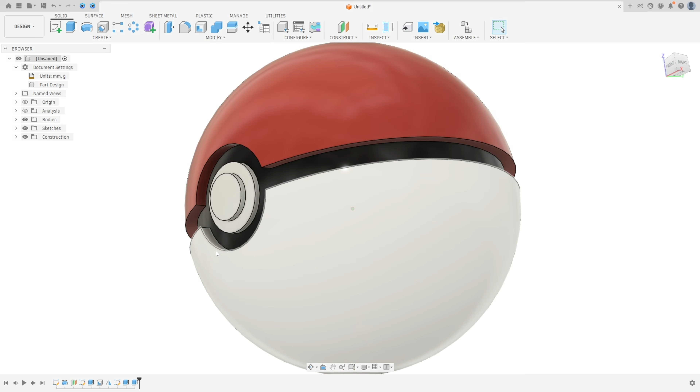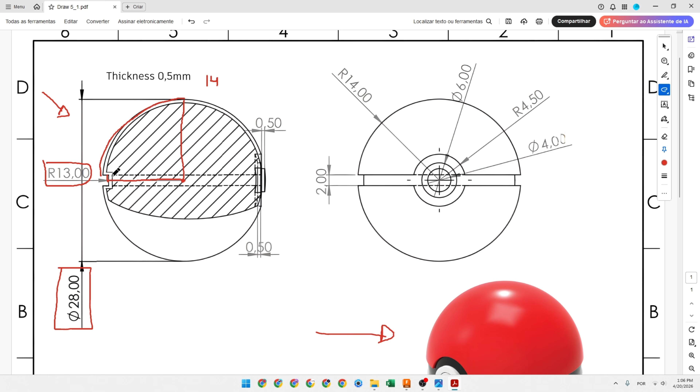The first step to create this Pokeball, we will select the front plane and make this sketch, with the midpoint here. First we create a center line with 14 millimeters of length, and create this arc with 14 millimeters. Then we create a line with 13 millimeters and create this arc with 13 millimeters. Then we create a line to close this sketch.

So open Fusion and go to create a sketch, select the front plane, select line, and make a line here with 14 millimeters, and create another line here with 13 millimeters.

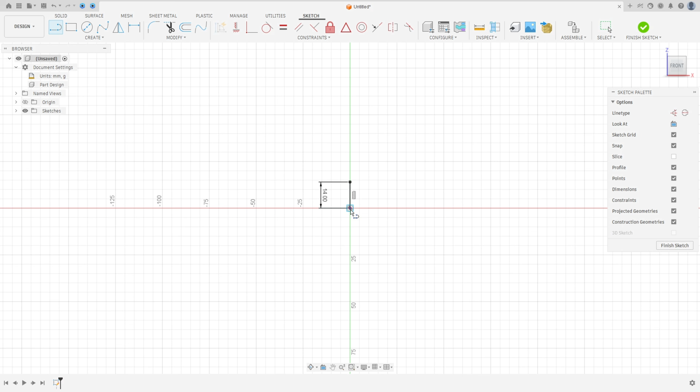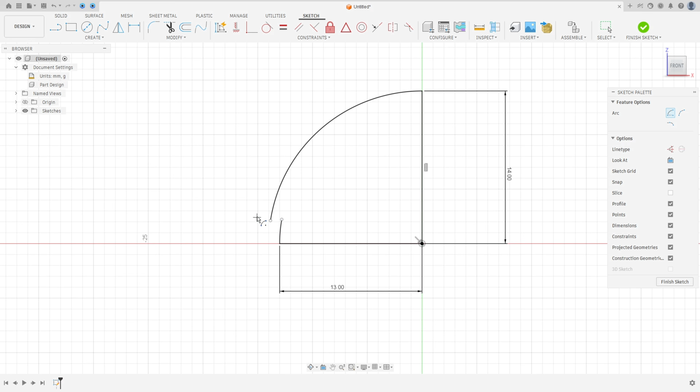Go to create, select arc, center point arc, click here in the midpoint, make an arc here, click in this point and click here in the midpoint again, make an arc here. Select a line, make a line between these 2 points.

This line must be a horizontal line, and the distance between this line and the midpoint is 1 millimeter. So go to sketch dimension, select this line and select this point here. The distance is 1 millimeter, press OK.

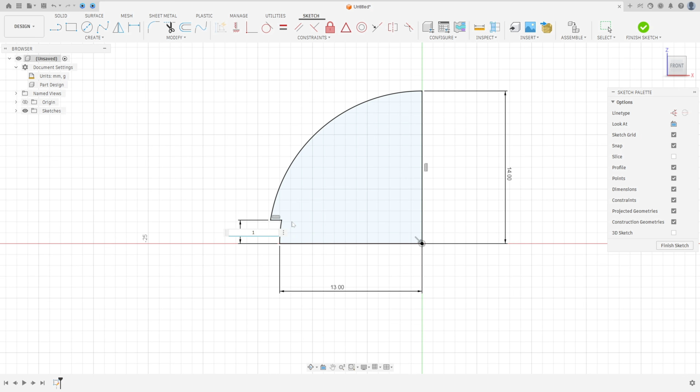Finish the sketch and go to revolve. The axis of revolution is this center line here, and operation is new body, press OK. We made this one.

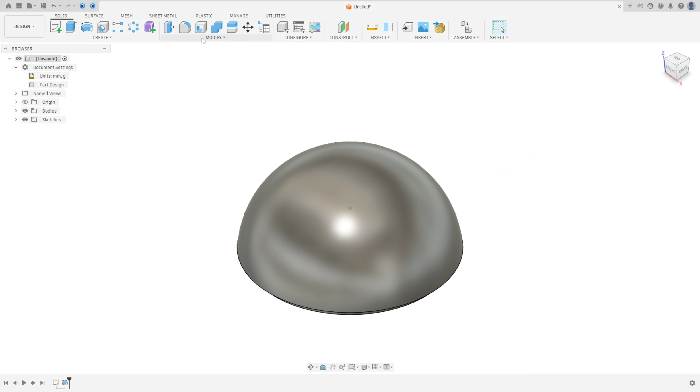Now we will create this cut here. So to create this cut, we select create a new plane, go to construct and select offset plane, and select the front plane here. Move this minus 20 millimeters and press OK.

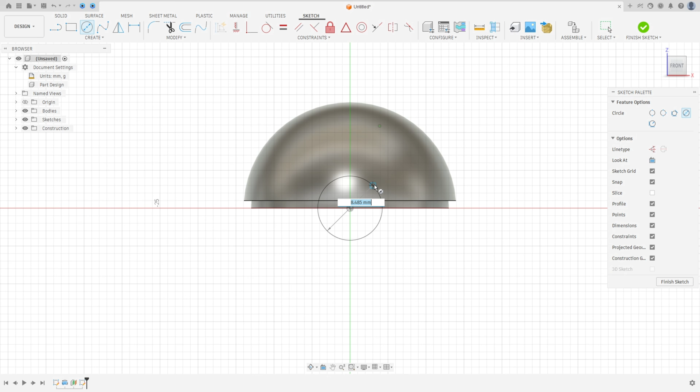Go to create a sketch and select this new plane. In this new plane, we will create the circle with 9 millimeters of diameter. So select the circle, click here in the midpoint, 9 millimeters of diameter, press OK. Finish the sketch, go to extrude, and for the extend type select 'to object', and for the object select this face here. The operation is cut, press OK.

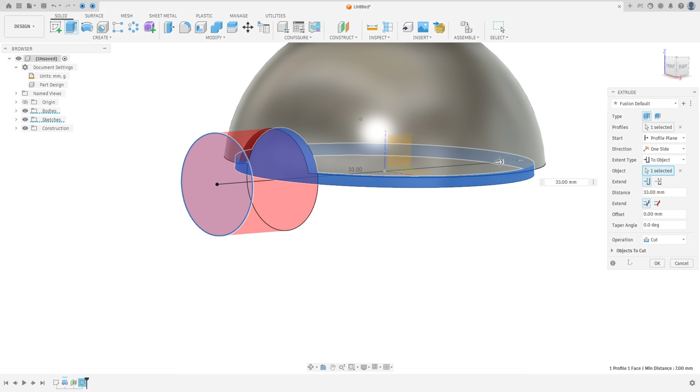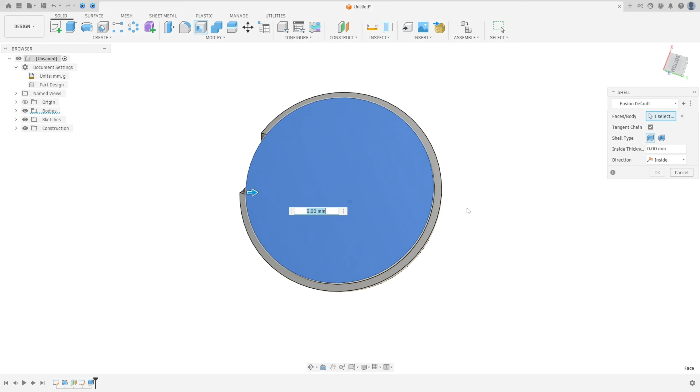We made this cut here. Now we will shell this body, and the thickness of this body is 0.5 millimeters. So go to modify, select shell. The face that we will remove is the bottom face, and the thickness is 0.5 millimeters, press OK. Let me show inside for you. Look at this.

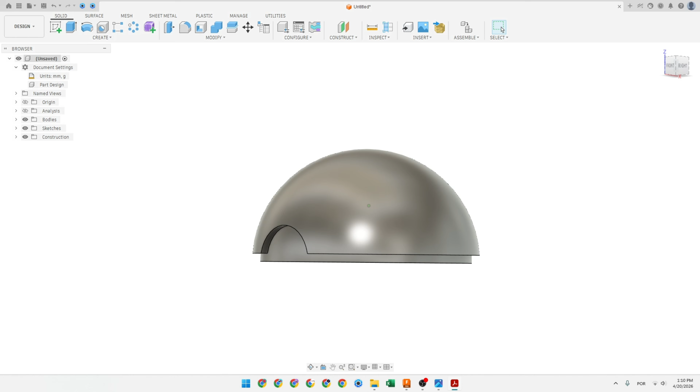Now we will create the bottom part. So to create the bottom side, we will mirror this body. Go to create and select mirror. The object type is body, and for the object select this body. For the mirror plane, you can select the top plane or select this face. Operation join, press OK. We made this.

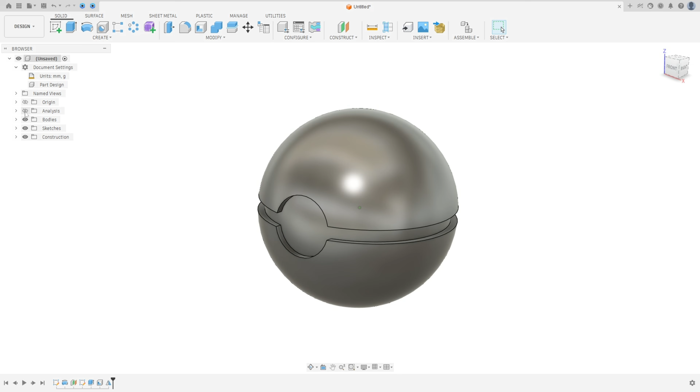Now we will create these 2 buttons here. Each button has 0.5 millimeters of distance for the extrusion. And the diameter here, we have a circle with 4 millimeters of diameter and a circle with 6 millimeters of diameter.

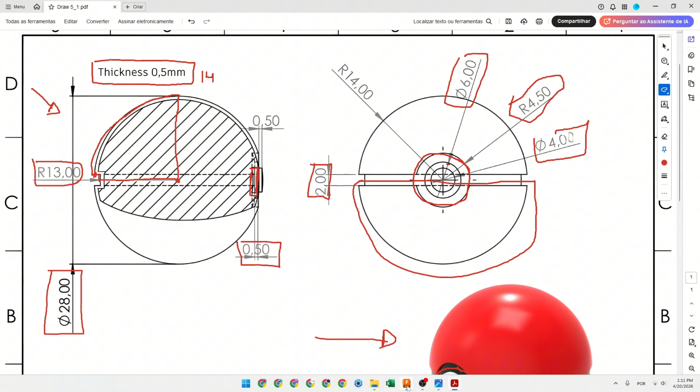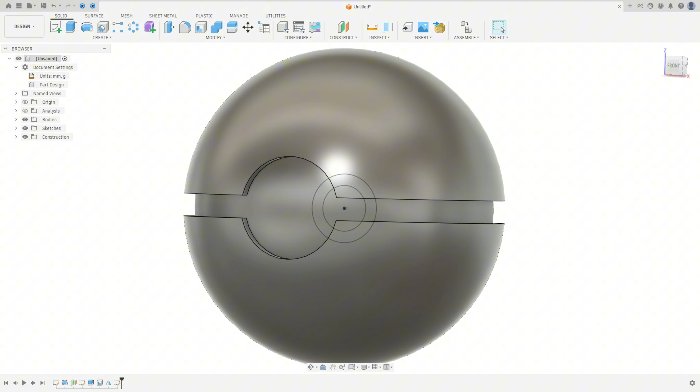So go to create a sketch and select the front plane. Select a circle, make a circle here with 6 millimeters of diameter, and create another circle in the center with 4 millimeters of diameter. Finish the sketch, and go to Extrude, and select all this circle here.

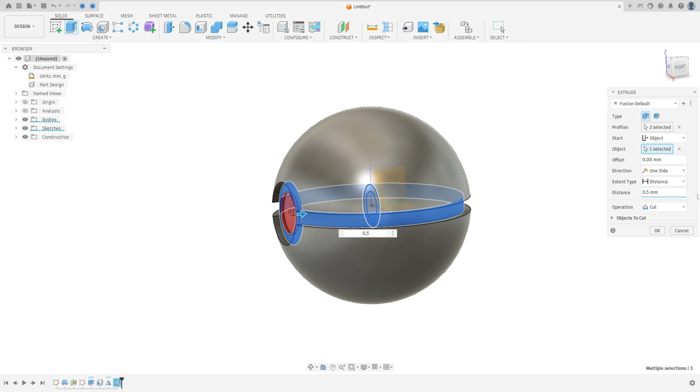Let me hide this bar a little bit. Select all this profile, and for the start select the object and select this face here. The extrusion here is 0.5 millimeters, but the direction will change here, so put minus 0.5 millimeters, operation join, press OK.

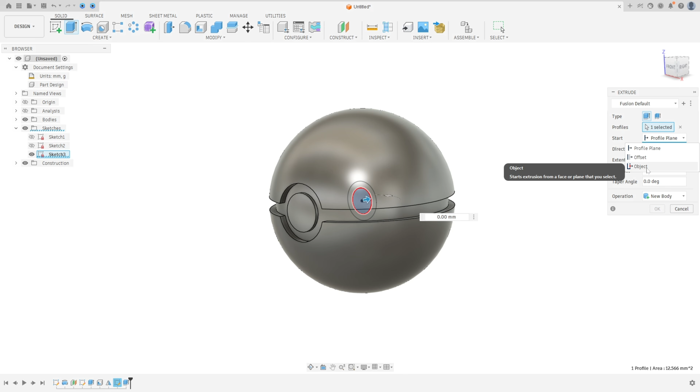Now show the sketch folder again, and go to extrude and select only the circle with 4 millimeters of diameter. For the start, select the object and select this face here, and the distance is 0.5 millimeters, so minus 0.5 millimeters for the distance. Operation join, press OK.

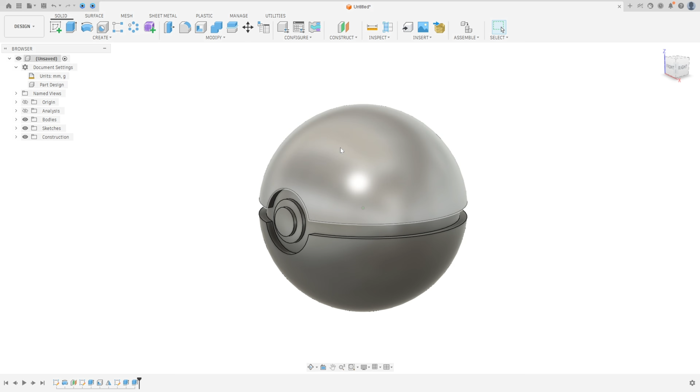Hide the sketch folder. And to add color here, we will select this face. This face will be red. So select this face, press letter A on the keyboard, select this face and these two faces here, and select a color. I'll go to paint, enamel glossy, select red.

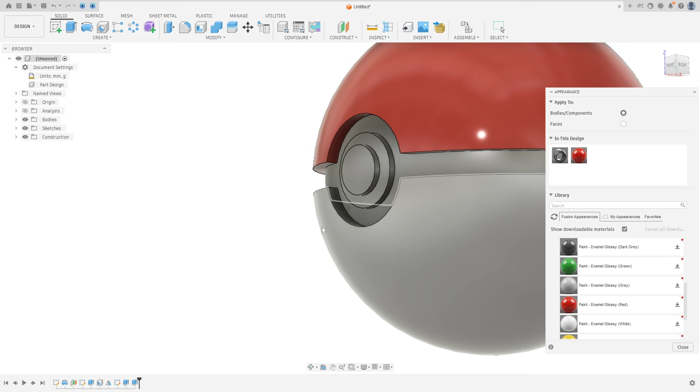And this face here is white. This face is black. And this button here is white. And this face here is white. You can change the color here, okay?